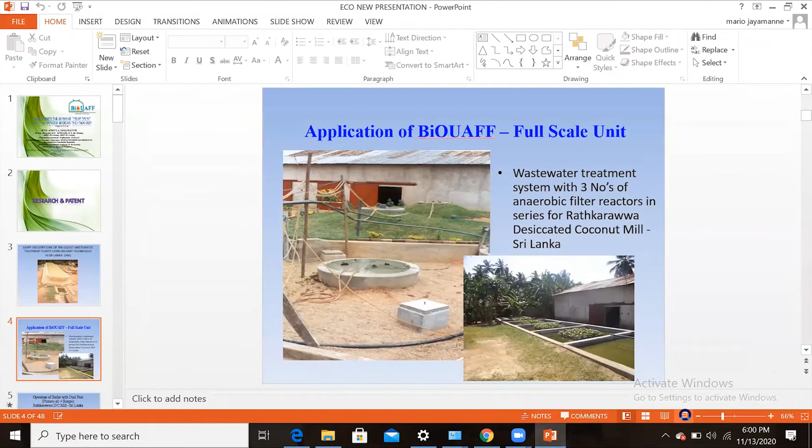In my very initial research work, I built digesters with the help of PVC tubes. The PVC tube was used as a small digester, and I did some small research work on the wastewater from desiccated coconut mills.

Wastewater from desiccated coconut mills has a very high pollution level. For example, the COD level is between 40,000 to 50,000 milligrams per liter, and BOD is around 25,000 to 35,000 milligrams per liter. With one digester I achieved some results at the mill, but in the laboratory with 3 small-scale digesters made with S-lon pipes of 8-inch diameter, I achieved good results.

Those results matched the requirements of the Central Environmental Authority. I then published some international papers with different universities, and got a scholarship to do my master's at AIT based on those publications. At that time there were also World Bank funds at the NERD Center. I went to AIT to do my master's, and my advisor asked me to do this same research to improve my knowledge.

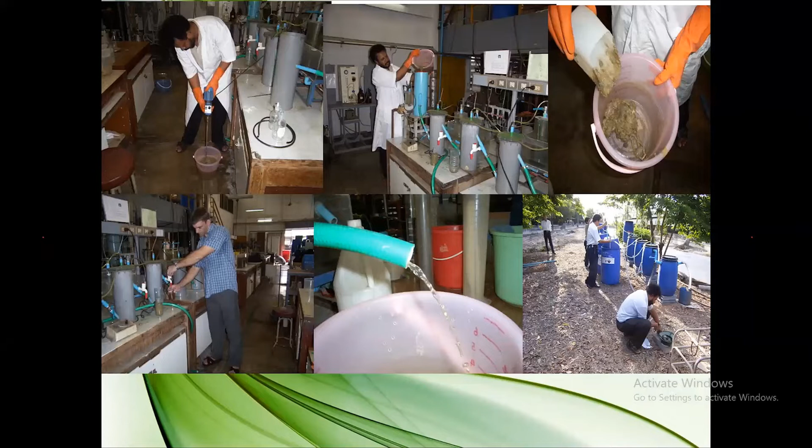This is the research I did at AIT. All digesters were constructed with PVC tubes like this, and inside those tubes were the bacterial filters, the anaerobic filters. First I used pig dung as the raw material, as raw wastewater. I mixed the pig dung with water and poured it into the inlet chamber. It goes to the bottom of the digester, comes up, goes to the next digester's bottom, comes up through the bacterial filters, then goes to the bottom of the third digester and comes up through the bacterial filter, and ultimately we obtain fairly good water.

My professor, Professor Lee, asked me to build a bigger scale version at a piggery. We went to a nearby piggery and installed 3 digesters with the help of gherkin barrels - a first digester, second digester, and third digester. We obtained the gas and also obtained the final treated water.

My whole thesis with this research - later on AIT staff sent me to Sri Lanka again to get the data from my research which I had done at Nerd Center with the help of coconut wastewater, that desiccated coconut mill wastewater, as a raw material which we used. After that, we got good results.

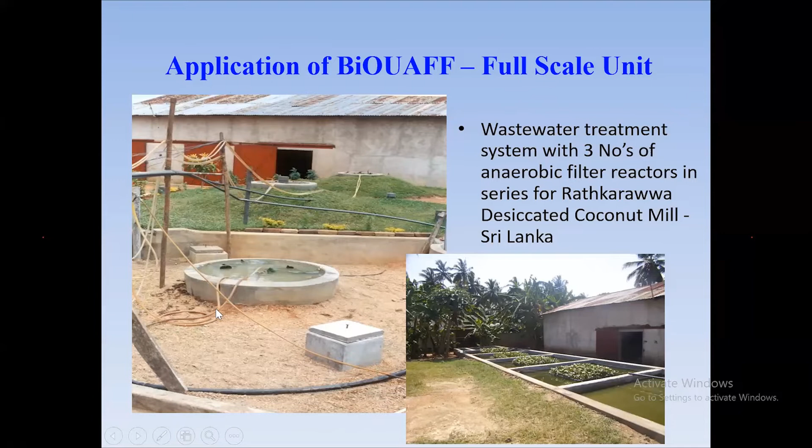A considerable amount of gas came out from the digesters, and we collected all that gas through pipes and fed it to the boiler, giving us considerable savings of fuel in the boiler.

Later on, once I returned to Sri Lanka, I had a number of opportunities to build wastewater treatment systems. One is the Sri Lanka Distilleries Private Limited at Wadduwa.

The wastewater amount is around 30 cubic meters per day, and the COD level is between 40,000 to 50,000, and it is very acidic also. So we had to construct 6 digesters in series like this.

First we feed the water to this digester - you can see the feeding line here - and it goes to the bottom of the digester, then second, third, fourth, fifth, and sixth. After that, it goes to the facultative tank.

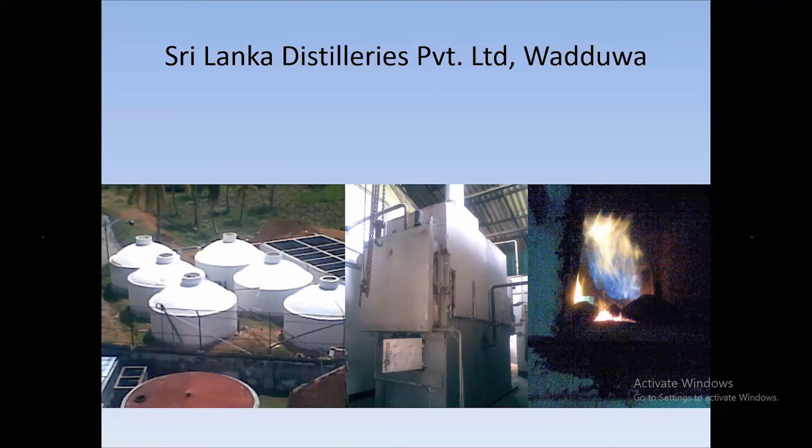It emits a huge amount of gas also, and we utilize that gas in the boiler - you can see the biogas flame inside the boiler. The boiler actually works with biogas as well as firewood, giving a considerable saving of firewood.

Now let me show some cross-sections of the digesters. The outer walls - for a small one, we can do it out of brick and cement with a concrete skeleton, or we can do it totally in RC concrete, reinforced concrete.

Inside, we can see the bacteria growing media, the BGM. The wastewater goes to the bottom and rises very slowly up to the top, and at the top it goes to the second one.

Like that, it goes to the third one or fourth one, according to the design, depending on the number of digesters. The number of digesters again depends on how much wastewater we are getting and what the COD and BOD levels of that wastewater are.

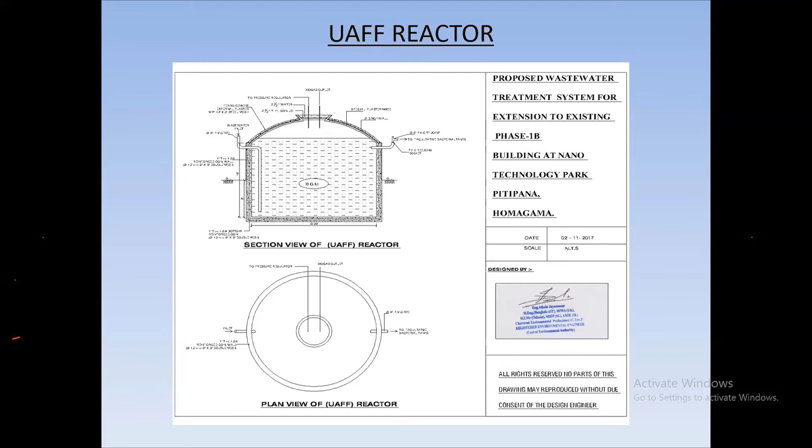After the digesters, it goes to the facultative tanks. These facultative tanks are a series of tanks - initially it enters the first tank and goes to the bottom, then comes up through the bacteria growing media, the bacteria filter, and goes to the second one.

The wastewater goes to the bottom and comes up through the filter, then goes to the bottom again and comes up through the filter - it flows in a zigzag pattern like that, all through the bacterial filters where the facultative bacteria is present.

Actually, the facultative bacteria is some sort of mixture of bacteria, or a cocktail of bacteria. It has anaerobic bacteria, aerobic bacteria, and in the middle we have facultative bacteria. Facultative means it can live with or without oxygen.

That bacteria can utilize the final nutrient from the anaerobic digesters. Initially we have anaerobic digesters, but they can only utilize 80% of the nutrient, and they also produce ammonia. That ammonia and the remaining 20% of nutrient get absorbed by the bacterial filters in the facultative bacteria tanks.

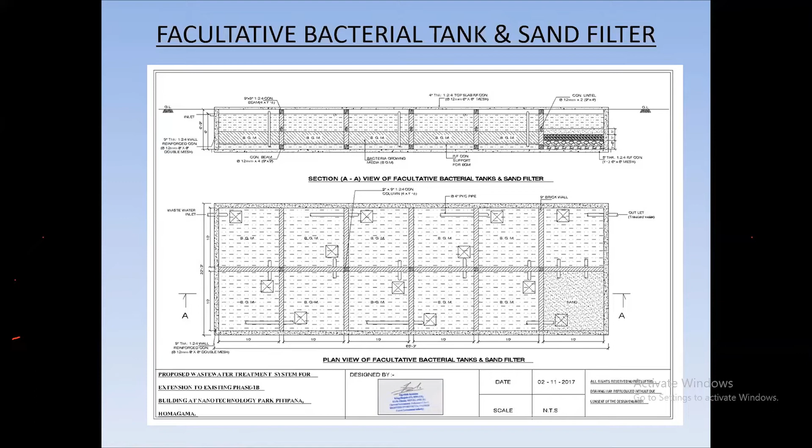We have a number of applications. I would like to show those to you all.

After treatment, the treated water has to be disposed of according to the standards of the Central Environment Authority. We can use the treated water for agriculture, or release it to a natural water body, but that water body should be fairly large, because the dilution factor required is 1:8. That means if you release 20 cubic meters of water, the water body should have a flow of 20 times 8, or 160 cubic meters. In most places, such a water body is not available.

Then we use some landscaping area, like this one. We have a pipe network, with one central pipe and branch pipes spaced about 8 feet apart at the centers.

We dig a trench with a depth of 4 feet. First we fill 1 foot with 3/4 inch metal and lay the perforated pipe, which has small holes along it. Then we fill the balance with another 1 foot of 3/4 inch metal.

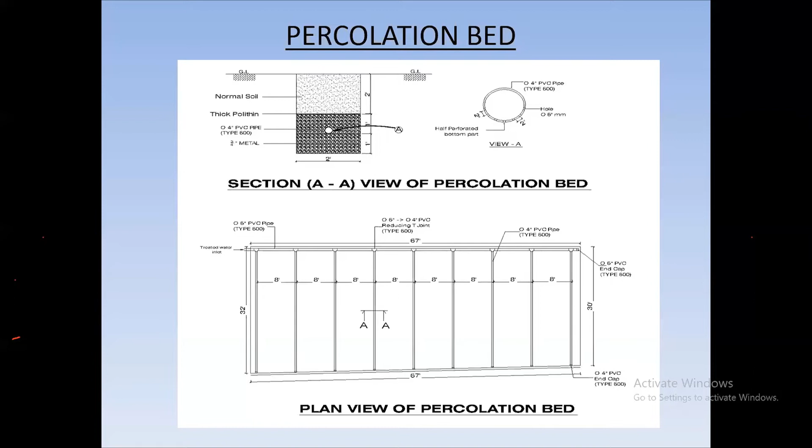I will show a number of applications. This is one, a Poltex garment factory with about 4,000 girls, whose wastewater output is around 100 cubic meters per day. Here we have about 5 digesters and 1 facultative tank.

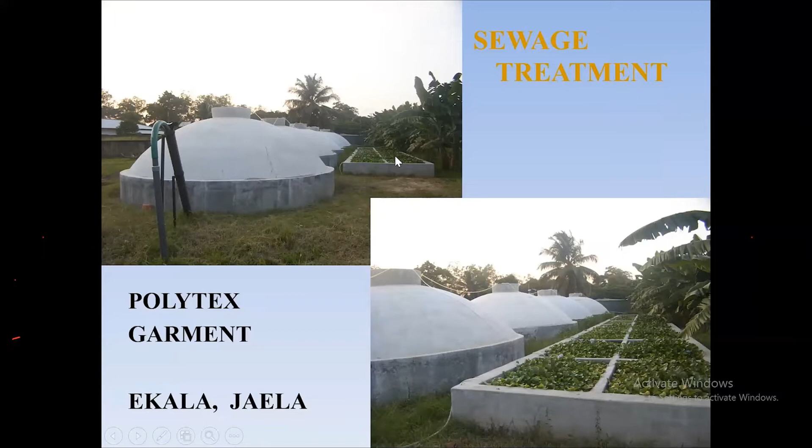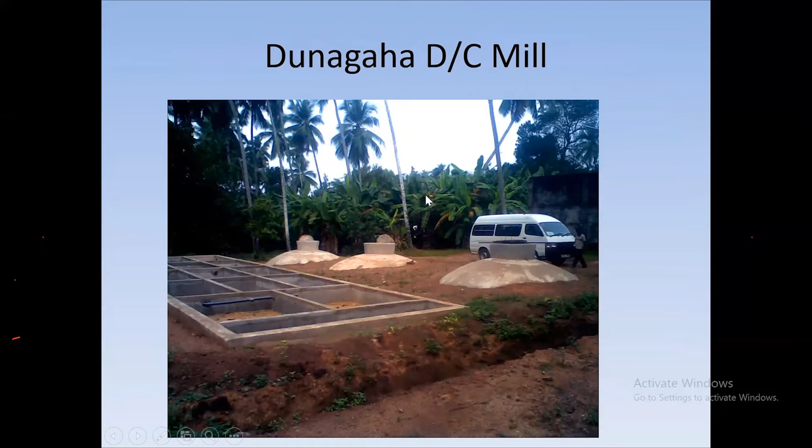And here in Sri Lanka, at Rockland Distillery, Marawila Distillery, these are the digesters, and they emit a huge amount of biogas from the spent waste. After distillation you get a spent residue, called Boda in Sinhala. Its COD value is around 60,000 to 70,000, and BOD comes up to 40,000. Because of this high COD and BOD, a huge amount of biogas comes out from the system.

During the night time it also emits gas, so to collect the nighttime gas we have a gas holder here - a floating drum gas holder. During the night it fills up, and the internal holder rises up to here.

During the daytime, we use that stored gas in the boiler here. This is a dual-fuel boiler - I converted it to run on dual fuel. This is the gas line, and this is the diesel line.

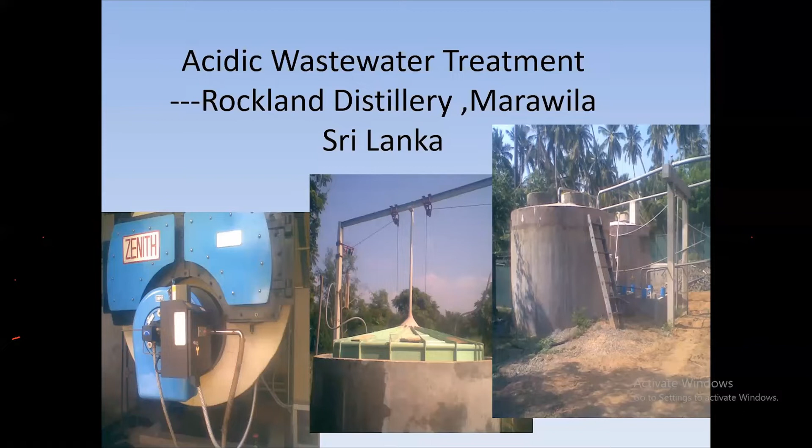We did this system about 10 years back. At that time, the diesel saving per day was around 35,000 rupees per day.

We constructed 4 or 5 digesters at the backside of the housing scheme, and another facultative tank is also available. The treated water we are leaving to the Angulana Lagoon.

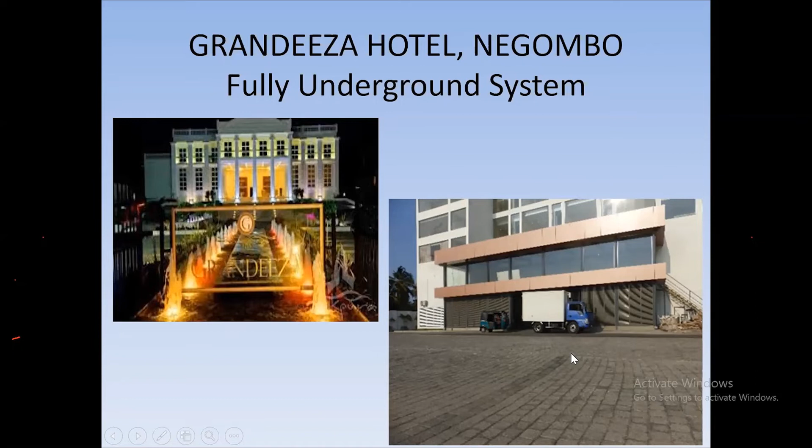And there are a number of underground applications we did. This is another one, Grandeeza Hotel.

Mr. Bob Kundamal, chairman of Lanka Construction, is the client. He first attended my presentation, and initially I did a small unit for a small scale system for a small housing scheme for his construction. Later on he did this Grandeeza Hotel, and here also our system is totally underground.

Here some manholes are available to install the bacteria filter at the beginning, but in some cases we lay the paving blocks on top of the manholes also.

There, what happened was when the Chinese were building the Norochcholai power station, they constructed the housing scheme and wastewater treatment as well. But that wastewater treatment system had about 27 aerator pumps along with other sludge and feed pumps.

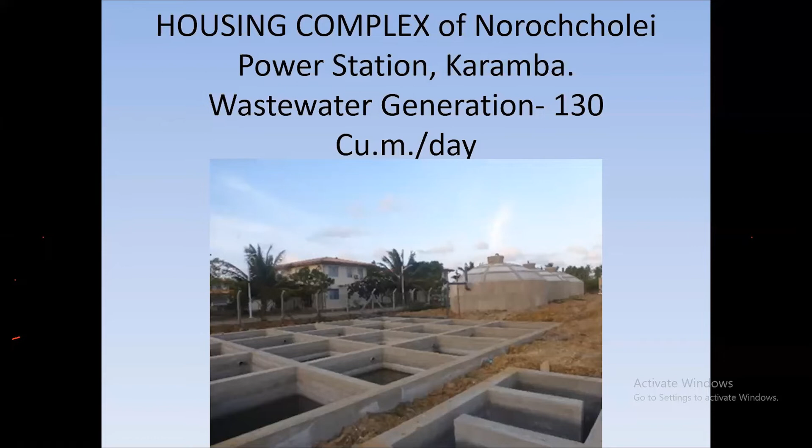Afterward, very recently, they are constructing another housing scheme at Daluwa near Norochcholai for expansion of the power station. For that tender also, they asked me to put a tender for construction of the wastewater treatment system. My tender was the lowest, and we have already been given the construction; we have already started the design part of the system.

Only a feed motor is needed, just one motor, to feed the wastewater from the collecting tank into the system.

And this is a household biogas system, for if you need a household scale. This one is actually in my own house, inside the kitchen. As I don't have enough space at the backside, I constructed the system inside the kitchen, and you can see only the mouth of the digester.

This water here is not wastewater, it's actually the water seal. Once we have this type of mouth, we have a clay sealing with a concrete lid at the bottom, putting the concrete lid at the bottom of the cone. To stop gas leaks, we put clay and cement on top of that lid.

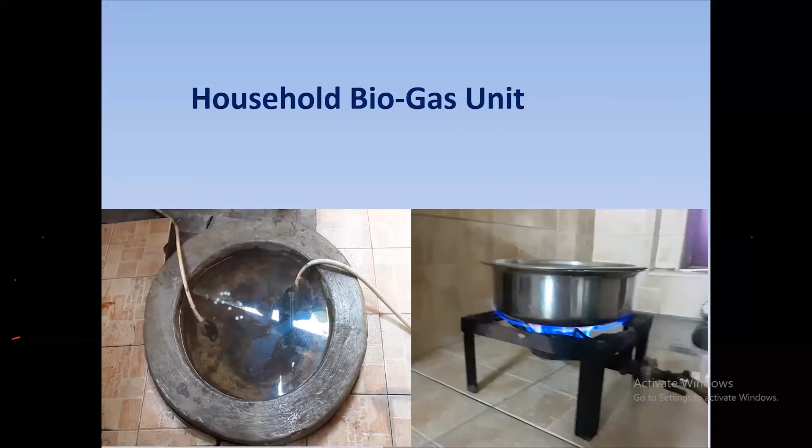This is the cross-section of the household unit, and this is the inlet gully - the sewage and kitchen wastewater lines can be connected to this gully, and the water goes to the bottom. We also have a mid wall, and the sewage and kitchen wastewater goes to the bottom, and day by day, as it feeds in through the wastewater and sewage, it rises up and passes the top of the intermediate wall, then goes to the bottom again. Actually, the wall is there to stop the system from short-circuiting. Otherwise, without this wall, the wastewater inlet here could short-circuit directly to the outlet here. So to prevent short-circuiting, we have an intermediate wall.

Ultimately it goes to this, which is called the pressure tank. With this, we have to maintain the pressure of the biogas outlet. And that outlet water, we can put into the soakage pit.

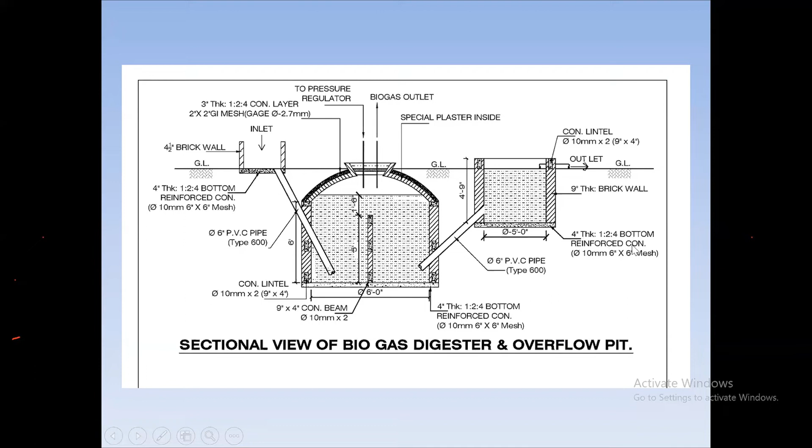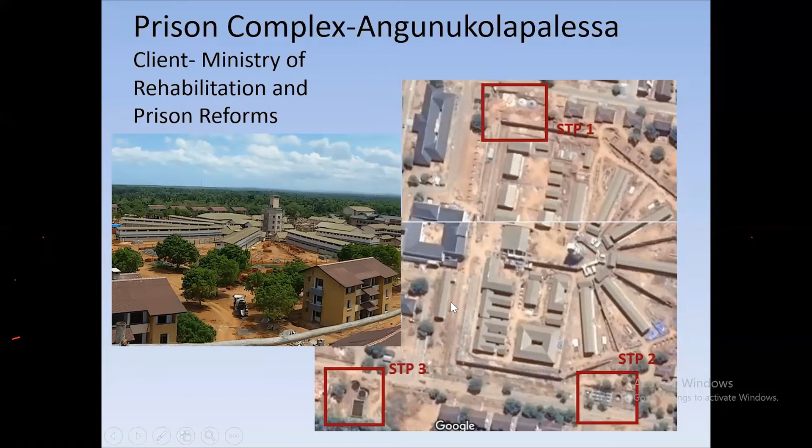And this is another project - the Environment Ministry building we did at Battaramulla. This is the digester and soakage facility, with a pond also, tanks also, and underground systems. And another one at the prison complex in Angunukolapalessa - these are the three places we have done digesters. This is an aerial photo we took from Google, showing the digesters, and we have 3 STP systems for this Angunukolapalessa prison.

Currently we have completed 16 projects in India, especially for desiccated coconut mills, but currently we are under construction on more. We couldn't go there now, but we have sent the bacterial filters and other associated items to India - they have already paid the money, but we couldn't go due to the corona problem. We have also completed one project in the Philippines and another one in Indonesia.

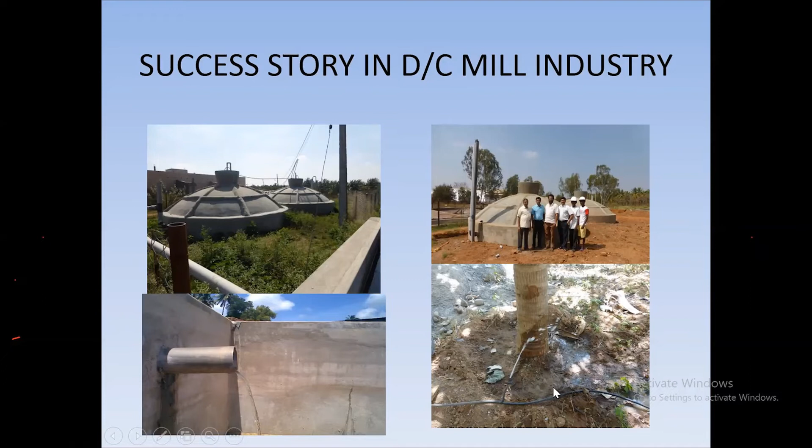The treated biogas is utilized because all the DC mills have oil traps. The DC mill wastewater consists of a lot of oil, and that oil can be trapped in oil trap tanks, called grease traps. All oil traps form a top scum after a few days. That top scum is collected and put into very big pans, and with the help of biogas they boil it to obtain non-edible low-grade coconut oil for low-grade soap manufacturing, and it is sellable again.

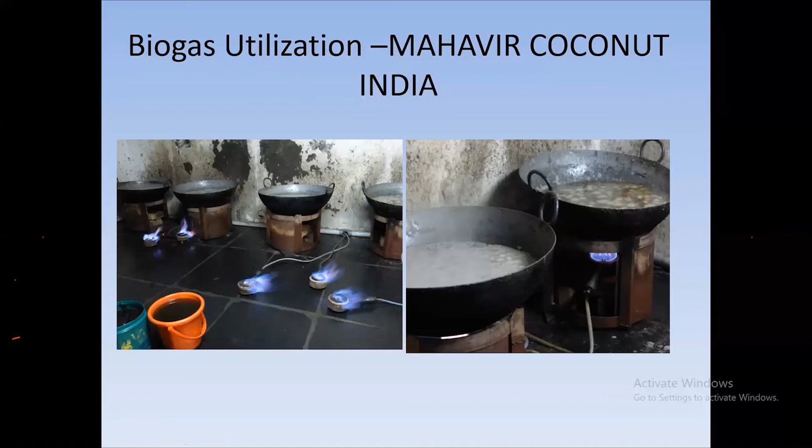The Pollution Control Board of India in Karnataka is very happy with my system. The Pollution Control Board is almost similar to our Environment Authority here. They conducted 3 seminars to expose my technology, especially among the DC millers, because so far they don't have any solution to treat the wastewater from desiccated coconut mills.

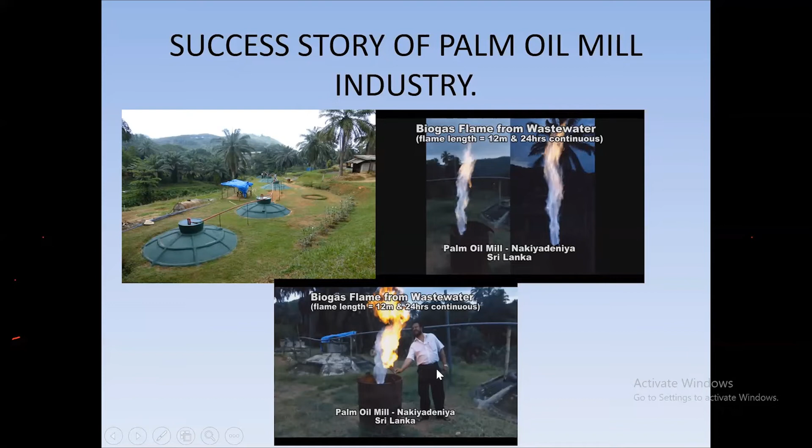Due to these works, I received a number of awards. Recently, in 2018, I won the Green World Award from England, and I was selected as a gold winner, a global gold winner. There are only a few gold winners selected for this competition. About 500 applicants were there from all over the world, and we were selected as a gold winner.

In 2015, from the UK again, I got the International Green Apple Award. The ceremony was held at the London Parliament. For this competition, they considered my projects, collected data on my credits, and telephoned most of my clients in India and Sri Lanka to get their acceptance and views about my system. Afterward, they selected me for the Green Apple Award.

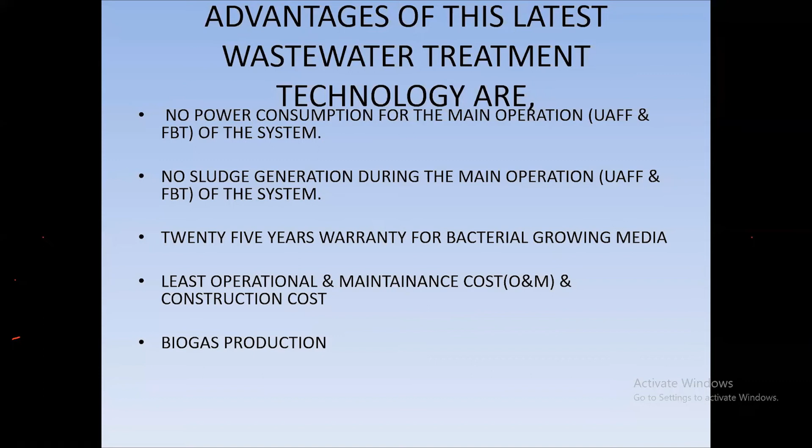And very least maintenance cost - there is no other maintenance. I only have to maintain top water and chlorination. Dripping can be done with the dripping of chlorine water with the help of a barrel and tap. And the other advantage is it produces biogas.

And there's the ability to treat wastewater in combination. For example, when we consider a hotel, it has sewage, bathing water, kitchen water, and laundry water - a lot of different wastewaters. But we can combine and mix all of those things and treat them together.

And zero odor and noise. Zero odor means all our digesters are fully closed down and sealed, so no odor comes out. And no noise either, because noise mainly comes from aerator pumps and other pumps, but there are none here.

And space is not a problem. If there is no space, we can build it totally underground, and use the top area for landscaping, a car park, or any other purpose.

And a long non-operation period is acceptable. For example, with desiccated coconut mills, during the low-yield period between November and January or February, they have to shut down the DC mills due to low coconut yield. Once shut down, the bacteria doesn't have feed, and it slowly turns to a hibernated position. Then after 3 months, once we send wastewater again as feed to the bacteria, it wakes up from the hibernated position and starts working. That is the special ability of this system.